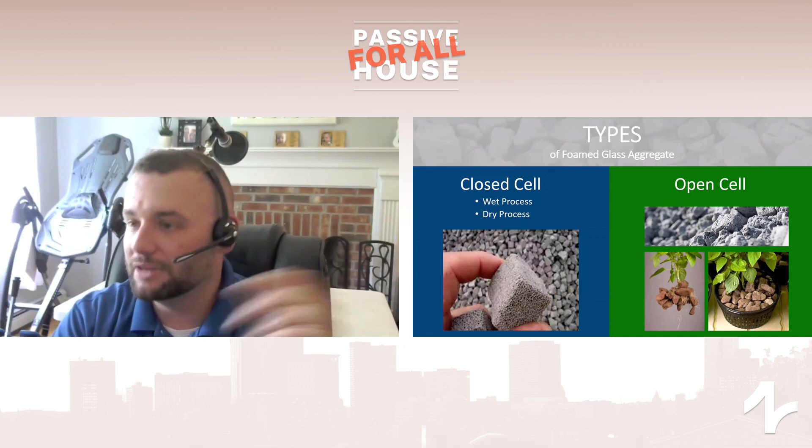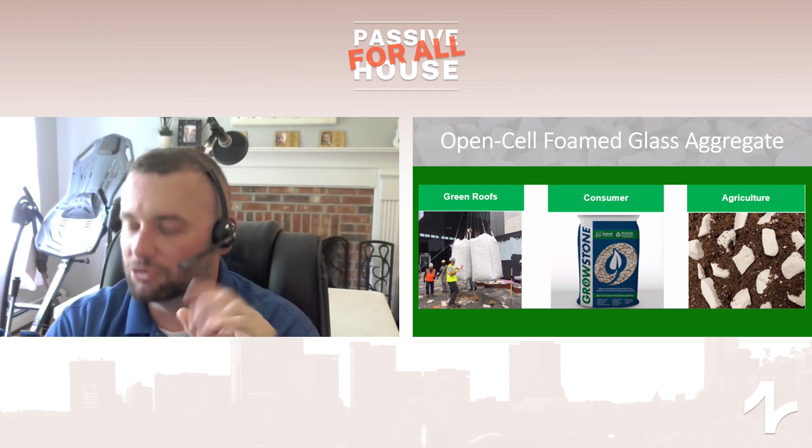So open cell is a unique product. So you think about water retention and soil and things like that. When you blend this material, use it on roof applications, it's very unique. So we have another market sector that just deals with blue roofs, green roofs, that stuff. There's a consumer brand we have called Growstone that is a crushed material. It's more used for big box stores because it's a lighter bag, so people can have this material and carry it out of the store, not break their backs, which is cool. So agriculture too, you can do it as a soil amendment. It's great for soil water retention and that interaction between the plants and the soil.

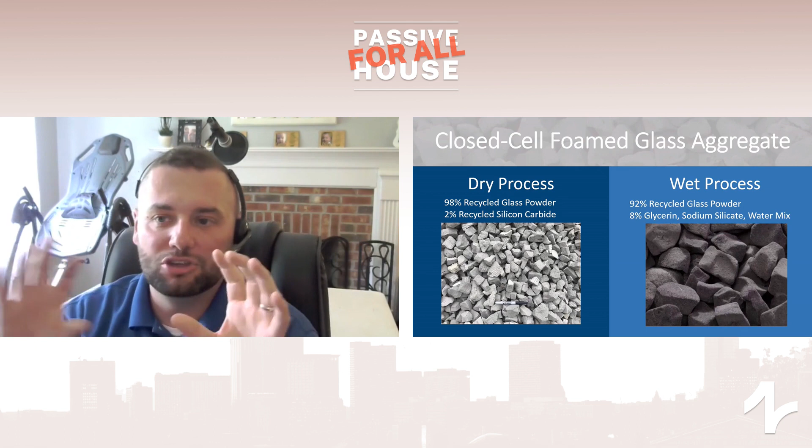Okay, so then the kind that we typically make and we see used, at least on the transportation side of things. I understand the people we're talking with now. I present this to you guys because in reality, you guys can use both, because the main application that passive home builders are going to use this material for is for insulation. This material insulates very well, but there are differences, okay? So for the wet process and dry process material, you'll see the ingredient mix there on the screen, and it's pretty self-explanatory. The dry process material we make is no wet product. There's no water, no slurry or anything.

There is a wet process that makes a different foam glass. You can see it makes it a little darker in color. It looks a little bit more like charcoal. And it doesn't change anything as far as the insulation, because what we're doing is still creating closed cell material that has bubbles not connected, right? So that's what keeps it interlocking. So the insulation properties are the same. What's different though is that the strength properties are different enough where it matters in the unique application.

So dry bulk density, from a weight perspective, they're very similar. You have 10 pounds a cubic foot, 14 pounds a cubic foot. Percentage wise, that's a lot, but it's still very, very lightweight material. What happens though with the wet material is that because you're adding water to the matrix, you're inherently making the material softer from a compression standpoint, right? So it can't take as much load. Again, it doesn't matter from an insulation perspective, because you guys are typically using this to insulate the building subgrade.

But in the transportation markets, where this is used below roadways, behind bridges, retaining walls, major infrastructure that needs a bit more robustness with the intercell structure, the dry process material is significantly stronger, like 3 times stronger. So those are the typical values as far as compressive strengths. That's the test that we run in our lab and the test that's run standard in Europe. There's also different tests they run in Europe. This one isn't quite as applicable for foam glass because it's really meant for boards. So you have a big thick section that you're trying to squeeze, which obviously makes no sense for a foam glass particle. But you do the test anyway because it's a standard. And the dry process material is definitely quite a bit stronger.

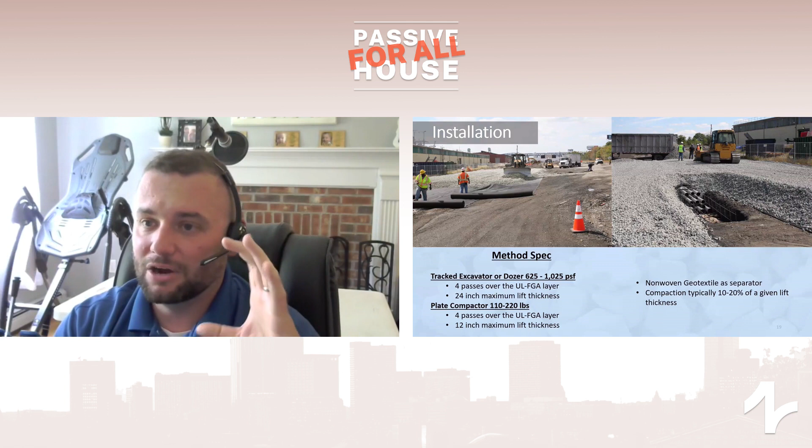I know I'm throwing a lot of information out. I got 6 minutes left.

This is how the material comes in. Also unique part of this is that we can ship a lot of material with not a lot of trucks. That is a 53-foot trailer. The 53-foot trailer holds about 80 to 90 yards at a time. Compare that to a triaxle truck holding soil or rock that only holds about 20 yards-ish, depending on the size of the trailer. You obviously hold more with a bigger trailer, but depending on the weight of the material, you don't want to get stopped by the state police. So I'll call it 20 yards of material.

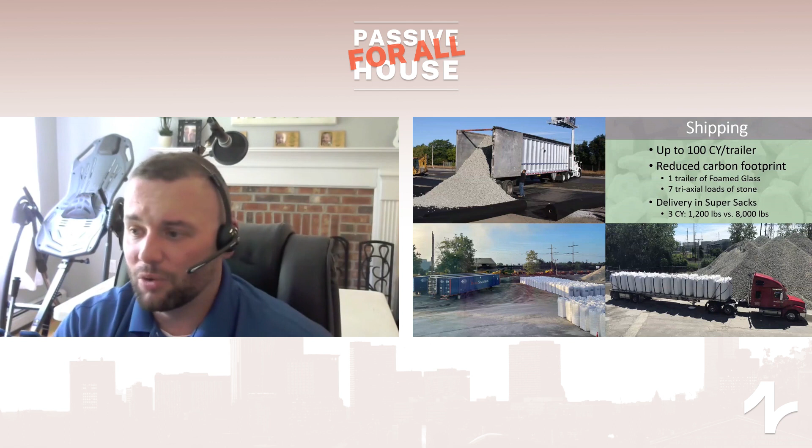And we get almost 100 yards, right? So just think of that scale. We can also bag it. We can put it on flatbeds or intermodal and ship it wherever in bags and containers. So those can go rail. They can go over the ocean. They can go wherever. So it's a very portable material because it's lightweight, right? Its carbon footprint is very low because it's not taking a lot of energy to get it from where we make it to where the end use is, okay?

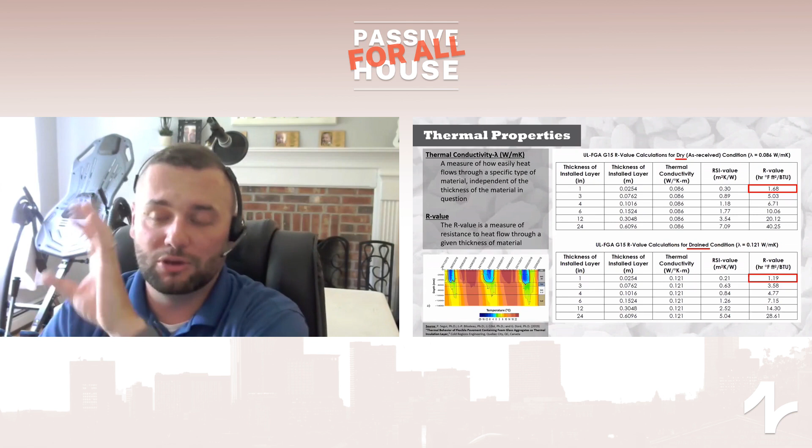So again, this is also just showing you have a dry value and a wet value. The dry value is about 1.7 R value per inch. So again, about 12 inches is going to be an R20. And then if it's wet for whatever reason, it's outside the building footprint, subject to rain, it's going to be about 1.2.

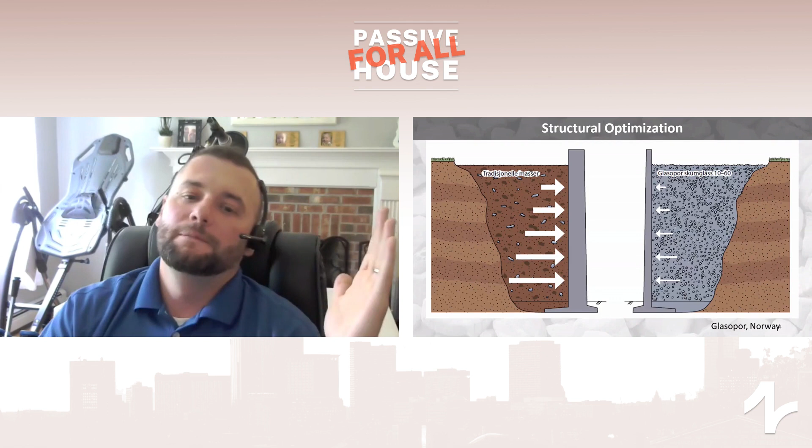Okay, I'm going to show some quick applications. This is more from the structural side. Just thinking about your foundation wall, right? Foundation walls are designed to hold back loads, typically because it's an open space underneath the building, but they have soil on the other side, so there's going to be pushing. There's less pushing because the material is not as heavy and it's got a very high friction angle, so this material has the equivalent fluid pressure of about 3 PCF, as opposed to soil, which is anywhere from about 20 to 40, depending on how you shake it.

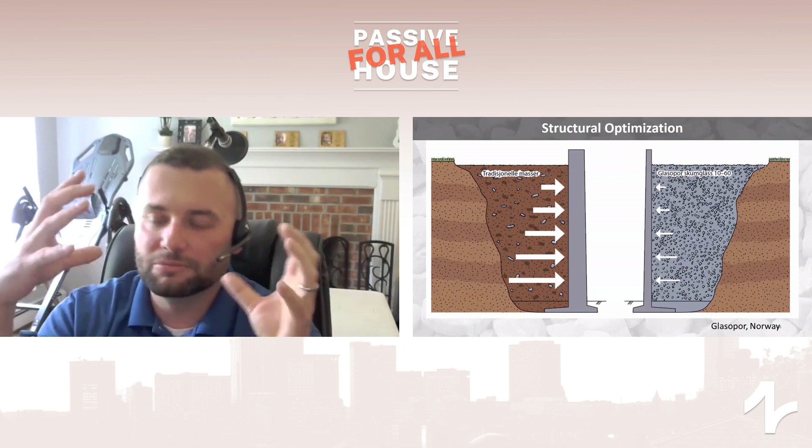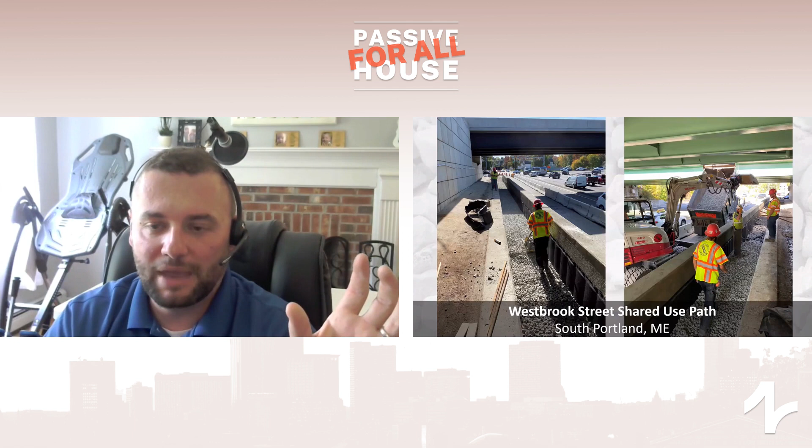Point being, you can really thin out your concrete. So this is having a system effect now, right? It's not just, oh, this material is an insulator. You can also use it to help reduce your concrete impact, your steel impact, things like that. This was done in Maine even on a bike path. They were trying to get this lightweight retaining wall to work underneath a bridge.

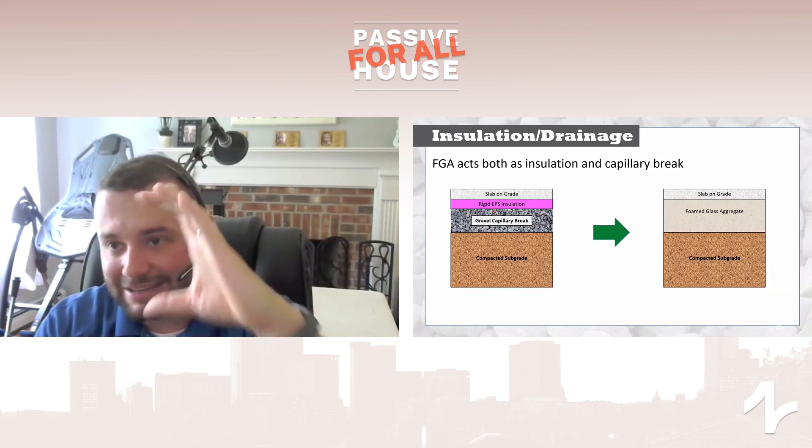Again, I'm talking about underslab applications. Typically, as a geotechnical engineer, you recommend a capillary break. That's breaking any of the water action coming up from the soil. Basically allows that frost disk to dissipate before it heaves your slab on grade. So again, that's a layer cake system where you have gravel and insulation. This material acts as gravel and insulation because it has the same characteristics as both. It also potentially acts as a radon collection system.

In this case, we did a project on the Cape. The soils are fine. They didn't need any lightweight. They wanted to use it for insulation, but they also had radon on the site. This material has the same gradation as a radon collection system, so you can use this material to convey radon gas as well.

It's going to have some settlement. They were going to put some soil on site and wait for 6 months for the settlement to occur. They didn't have time for that. So they basically removed some soil, put the lightweight fill back, and there was so much stress relief on the site, they were able to get that built pretty quickly.

Okay, I got 2 minutes.

And again, I show a lot of big projects. We do a lot of DOT projects, but foam glass is very scalable because we're just shipping by the truck. So if you need 1 or 2,000 trucks of foam glass, it is what it is. It's a unit rate, right? So the unit rate applies to whatever you're buying. The unit rate typically right now is anywhere from about $90 to $100 per cubic yard, because I know people might ask that question. Shipped anywhere in New England, that's where we're typically at.